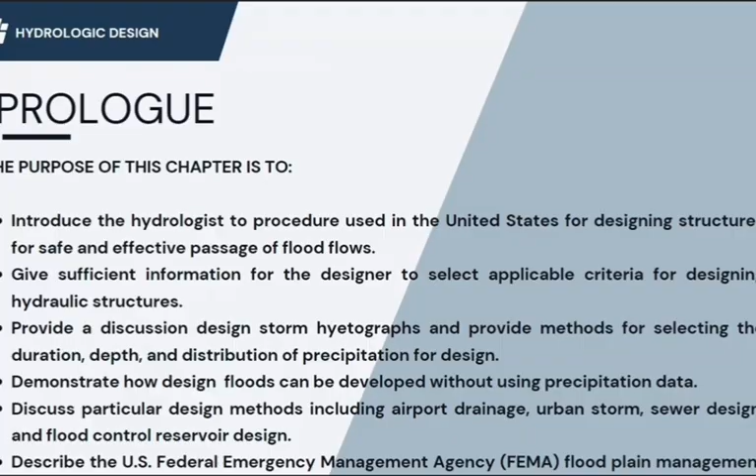Hydrologic design procedures. Procedures for estimating design flood flows. Interest can be in either the peak flow rate or the entire hydrograph.

Include methods that examine historical or projected flood flows to arrive at a suitable estimate - flow-based methods - and methods that evaluate the storms that produce floods and then convert the storms to flood flow rates.

Precipitation-based methods. In each case, the analysis can be based on selecting a design frequency and determining the associated flood, called frequency-based methods, or developing designs for a range of flood frequencies and narrowing the final choice on the basis of

long-term costs and benefits, called risk-based methods, or designing on the basis of an estimate of the probable maximum storm or maximum flood that could occur at the site, called critical event methods.

Minor structure design. Minor structure design is largely based on frequency-based or sometimes risk-based methods. Several steps in the hydrologic approach to minor structure design are common to most design handbooks and adopted techniques.

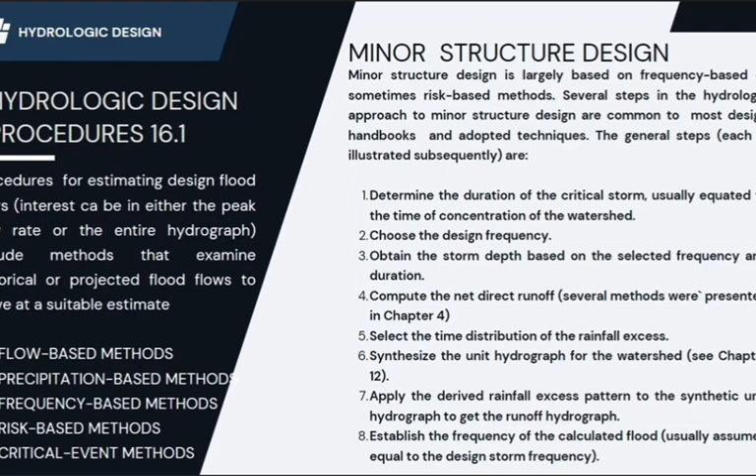Number 7, apply the derived rainfall excess pattern to the synthetic unit hydrograph to get the runoff hydrograph. Number 8, establish the frequency of the calculated flood, usually assumed equal to the design storm frequency.

Major structure design. Hydrologic design aspects of major structures are considerably more complex than those of a small dam, crossroad, culvert, or urban drainage system.

A design storm hydrograph for large dams still is required, but it is put to greater use. The design storm hydrograph is routed to determine the adequacy of spillways and outlets operated in conjunction with reservoir storage.

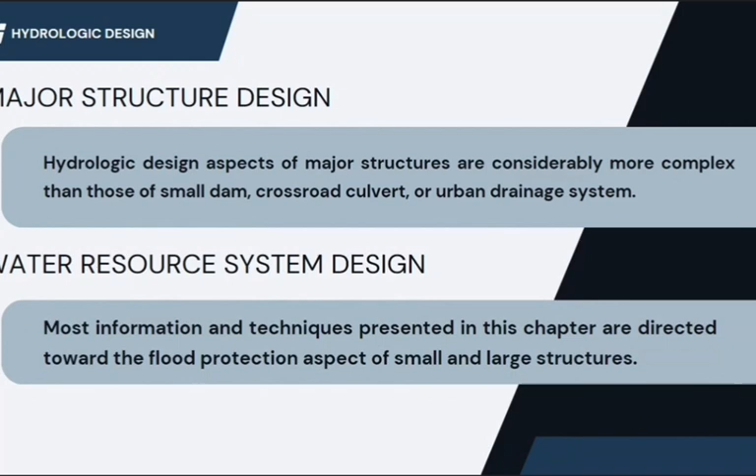Degree of protection provided for downstream life and property, project economy, agency policy, and construction standards, and reservoir operational requirements. Major structure design is largely based on critical event methods.

Next is water resource system design. Most information and techniques presented in this chapter are directed toward the flood protection aspect of small and large structures.

Needless to say, a major structure is designed for more than just flood protection. It is multi-purpose and may provide storage for irrigation, power, water supply, navigation, and flow augmentation.

The proper allocation of storage to these uses requires an understanding of the entire stream flow history in terms of the frequency of occurrence of low flows and average monthly, seasonal, and yearly flows, as well as the historical and

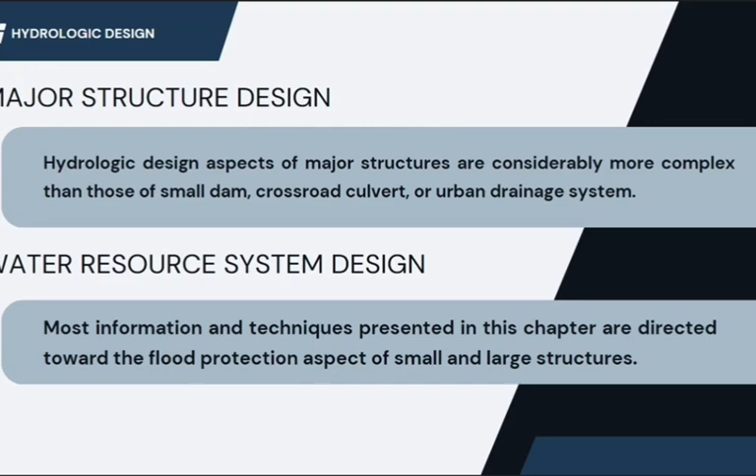design floods. Next, flow-based methods. For design locations where records of stream flows are available or where flows from another basin can be

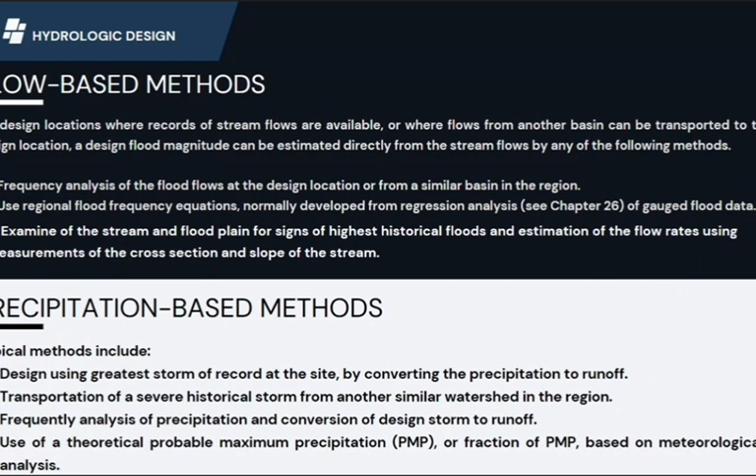transported to the design location, a design flood magnitude can be estimated directly from the stream flows by any of the following methods. Number 1, frequency analysis of the flood flows at the design location or from a similar basin

in the region. Number 2, use regional flood frequency equations normally developed from the regression analysis of gauged flood data.

Number 3, examination of the stream and floodplain for signs of highest historical floods and estimation of flow rates using measurements of cross-section and slope of the stream.

Precipitation-based methods. Typical methods include design using the greatest storm of record at the site by converting the precipitation to runoff. Number 2, transposition of a severe historical storm from another similar watershed in the region.

Number 3, frequency analysis of precipitation and conversion of design storm to runoff. Number 4, use of a

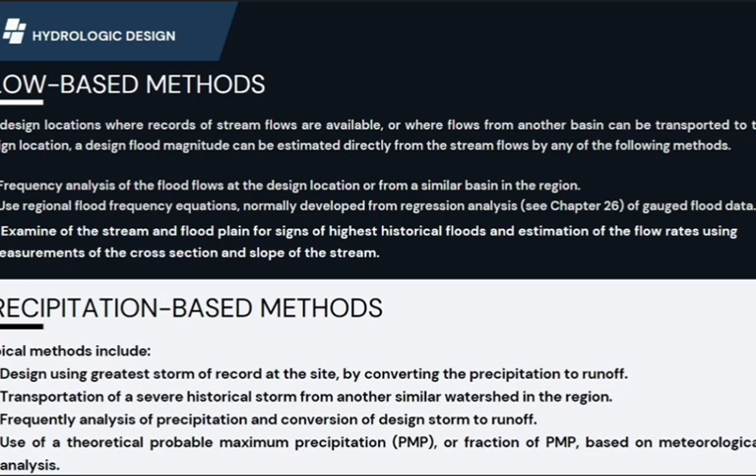theoretical probable maximum precipitation or fraction of PMP based on meteorological analysis.

Frequency-based methods. Regardless of whether flow or precipitation data are used, design most often proceeds by selecting a minimum acceptable recurrence interval and using procedures from Chapter 27 to determine the corresponding worst condition storm or flood that could be equaled or exceeded during the selected recurrence interval. Criteria for selecting design recurrence intervals are summarized in section 16.3.

Results from frequency analysis of flood flow data normally provide reliable estimates of 2, 5, 10, and 25-year flows. Extrapolation beyond the range of the period of flow records is allowed, but is less reliable.

Risk-based methods. Recent trends in the design of minor and major structures are toward the use of economic risk analysis rather than frequency-based design. The risk methods select the structure size as that which minimizes total expected costs. These are made up of the structure cost plus the potential flood losses associated with the particular structure.

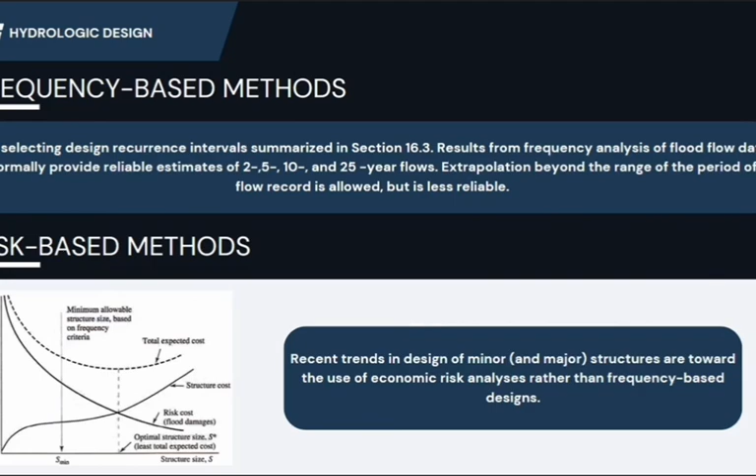Critical event methods. Because of the high risk to lives and property below major structures, their design generally includes provisions for a flood caused by a combination of the most severe meteorologic and hydrologic conditions that are possible. Instead of designing for some frequency or least expected total cost, flood handling facilities for the structures are sized to safely store or pass the most critical storm or flood possible.

Methods for designing by critical event techniques include: number 1, estimating the probable maximum precipitation and determining the associated flood flow rates and volumes by transforming the precipitation to runoff. Number 2, determining the probable maximum flood by determining the PMP and converting it to a flood by application of a rainfall runoff model, including snow melt runoff if pertinent.

Number 3, examining the floodplain and stream to identify paleo flood evidence such as high water marks, boulder marks on trees or banks, debris lines, historical accounts by local residents, or geologic or geomorphologic evidence.

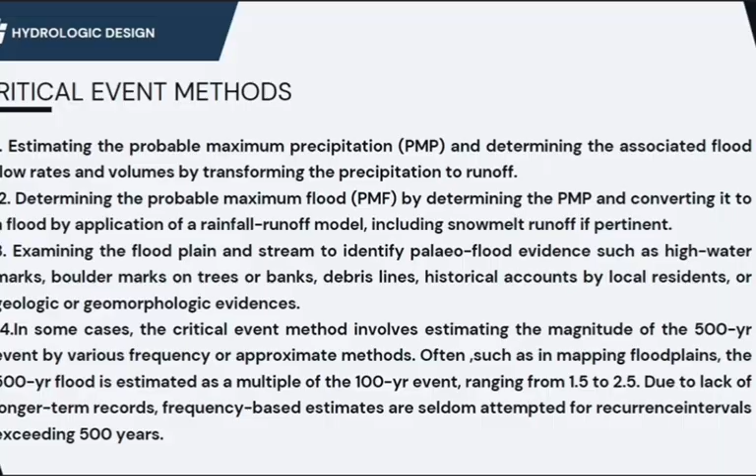Data for hydrologic design. The design of any structure requires a certain amount of data, even if only a field estimate of the drainage area and a description of terrain type and cover. The following material identifies some general data types and sources.

Physiographic data. Hydrologic study for any structure requires a reliable topographic map. United States Geological Survey topographic maps usually are available. The mapping of the United States is almost complete with 15-minute quadrangles, and many of these are mapped by 7.5-minute quadrangles. County maps and aerial photos can also be used to advantage in making preliminary studies of the watershed.

Hydrologic data. One difficulty in hydrologic design is that of getting data for the region under study. Considerable data can be acquired from previously published reports issued by governmental agencies and or universities. The following is a list of federal agencies that publish hydrologic data.

Agricultural Research Service, Soil Conservation Service, Forest Service, U.S. Army Corps of Engineers, National Oceanic and Atmospheric Administration, Bureau of Reclamation, Department of Transportation, U.S. Geological Survey Topographic Division, U.S. Geological Survey Water Resources Division. Additional data often can be procured from departments of state governments, interstate commissions, and regional and local agencies.

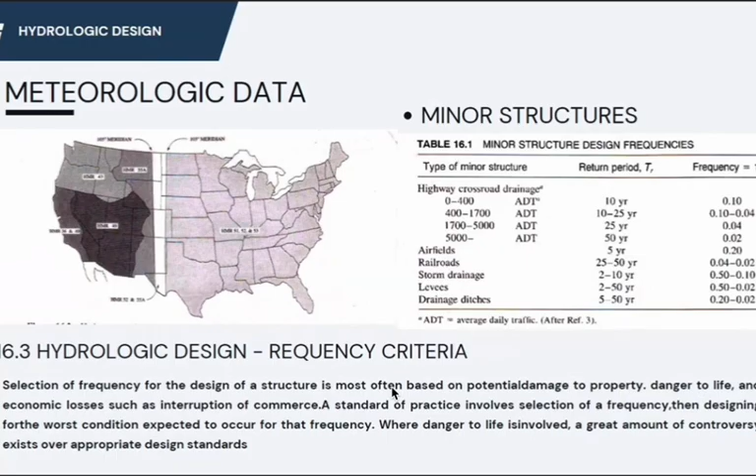Large dams. Dams require hydrologic analysis during the design of the original structure and during periodic safety evaluation. Significant economic and human losses are possible when large quantities of water are rapidly released from storage. Initial heights of retarded water behind the dam, disregarding the total volume of stored water, can produce destructive flood waves for a considerable distance downstream.

Based on two criteria, the Task Force on Spillway Design Floods recommended the classification of large dams as listed in Table 16.2. The type of construction has not been included in this grouping, although it affects the extent of failure resulting from overtopping. Many of the federal agencies have adopted definitions for hydraulic elements of dams. The following list is used by the Soil Conservation Service.

A spillway is an open or closed channel, or both, used to convey excess water from a reservoir. It may contain gates, either manually or automatically controlled, to regulate the discharge of excess water.

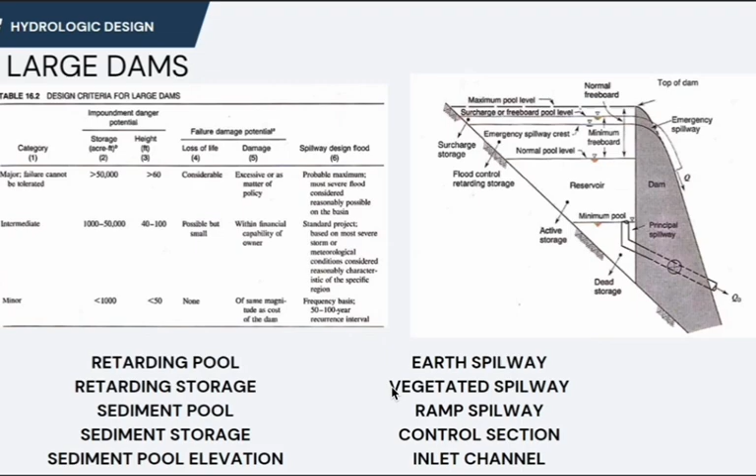Small dams customarily are designed using two or more levels of frequency to provide an emergency spillway and ensure an adequate allowable freeboard.

Class A structures are located in rural or agricultural areas where failure might damage farm buildings, agricultural land, or township or country roads. Class B structures are located in predominantly rural or agricultural areas where failure might damage isolated homes, main highways, or minor railroads, or cause interruption of use or service of relatively important public utilities.

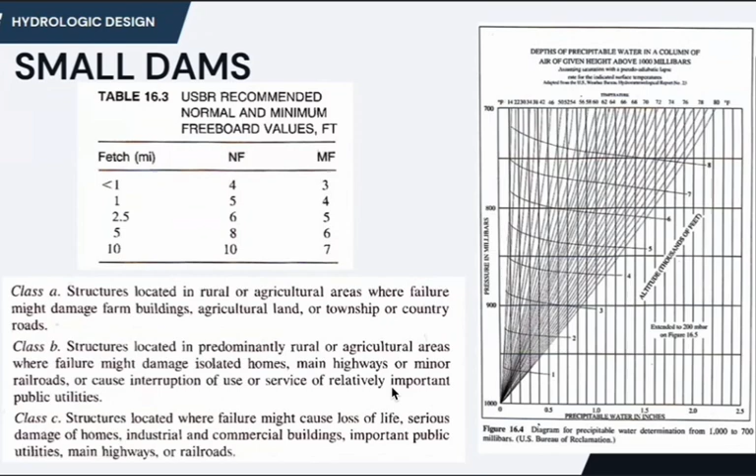Class C structures are located where failure might cause loss of life, serious damage of homes, industrial and commercial buildings, important public utilities, main highways, or railroads.

Estimates of PMP are based on an investigation by the U.S. Weather Bureau conducted to establish the maximum possible amount of precipitable water that could be achieved throughout the United States.

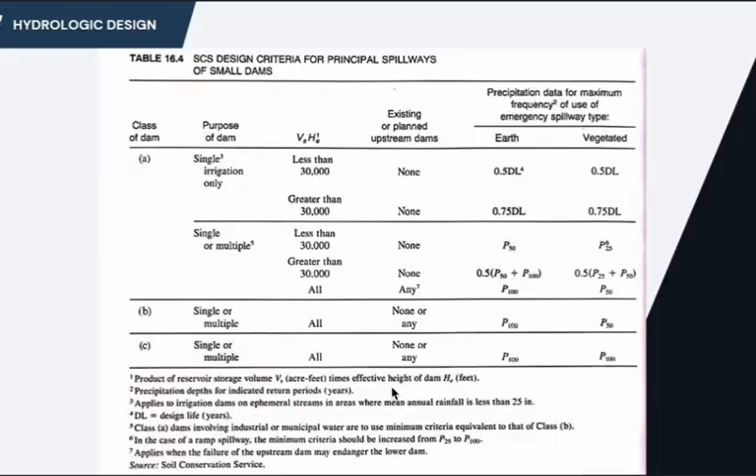Major structures. Three general terms described in Table 16.2 are employed to designate design flood for major structures: the probable maximum flood, the standard project flood, and the frequency-based flood.

The concept of flood in this section is described by an entire discharge hydrograph that is generally synthesized from rainfall estimates. Corresponding to the three flood designations are the storm values, that is, the depth of rainfall.

These storm values are referred to as the probable maximum precipitation (PMP), the standard project storm (SPS), and the frequency-based storm. Design of the reservoir system components is commonly based on one of these representative terms, with descriptions given in the next section on design storms.

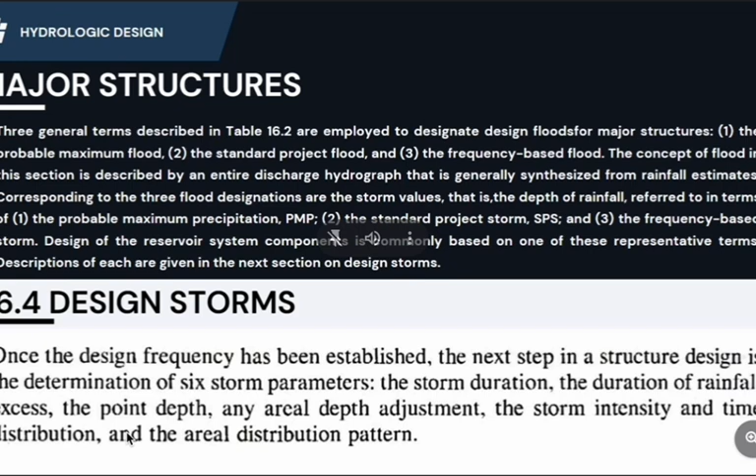Design storms. Once a design frequency has been established, the next step in structure design is the determination of six storm parameters: the storm duration, the duration of rainfall excess, the point depth, any areal depth adjustment, the storm intensity and time distribution, and the areal distribution pattern.

Duration. The length of storm used by the SCS in designing emergency and freeboard hydrographs for small dams is of 6-hour duration or the time of concentration TC, whichever is greater. Often the minor structure being designed cannot be justified economically on the basis of this length of storm.

For many minor structures, particularly urban drainage structures, a design flood hydrograph is based on a storm duration equal to the time of concentration of the watershed. This procedure uses the rational method of Chapter 15 or the synthetic unit hydrographs of Chapter 12, along with a critical storm pattern procedure produced by arranging the rainfall excess pattern into the most critical sequence.

The SCS uses 24-hour durations for all urban watershed studies. Durations of approximately 6 hours or less are satisfactory for small watersheds, but the lengths of storm for large areas require storm depths for periods of up to 10 days.

Frequency-based values are available for durations of from 2 to 10 days for locations within the United States. Similar data are also available for other selected areas outside the United States. Generally, however, the design criteria for large dams require estimates of storm depths that do not have a frequency level assigned.

IDF relationships: for short duration storms over small areas, the most convenient method of determining storm depth is to acquire the intensity duration frequency curve for the location, enter the graph with the selected duration and frequency, and convert the resulting intensity to depth of rain over the selected duration.

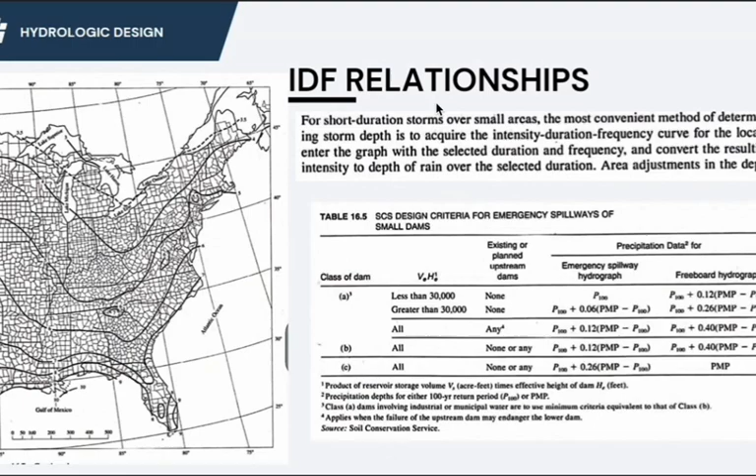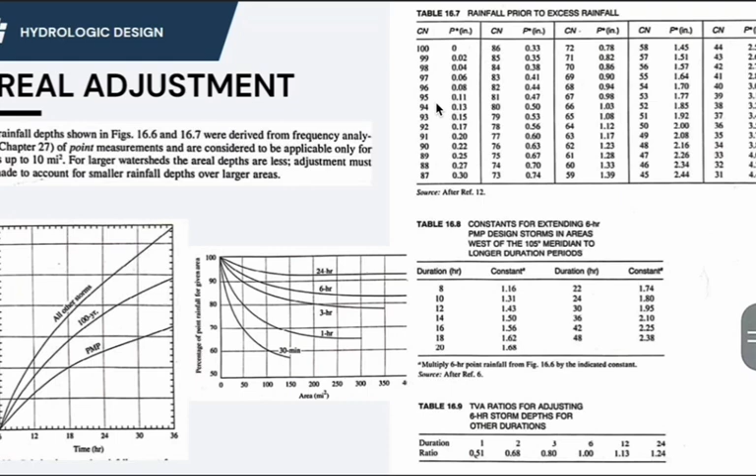Area adjustment in the depth. Areal adjustment: the rainfall depths shown in figures 16.6 and 16.7 were derived from frequency analysis of point measurements and are considered applicable only for areas up to 10 mi². For larger watersheds the areal depths are less, so adjustment must be made to account for smaller rainfall depths over larger areas.

Duration frequency curves define the rain intensities for delta T, 2 delta T, 3 delta T, etc. increments of time, then these blocks of rain intensities are organized in some pattern, usually symmetrical, around the center of the storm, ensuring that the area under the hyetograph equals the design storm depth P, spread over the design storm duration D.

To apply the procedure, successive depths of equal probability storm with durations of delta T, 2 delta T, 3 delta T, 4 delta T are determined from the IDF curve and tabulated. Next, any of a variety of procedures such as the alternating block method, the Chicago method, or the balanced method are available for distributing these blocks and assuring that the total rain depth equals P.

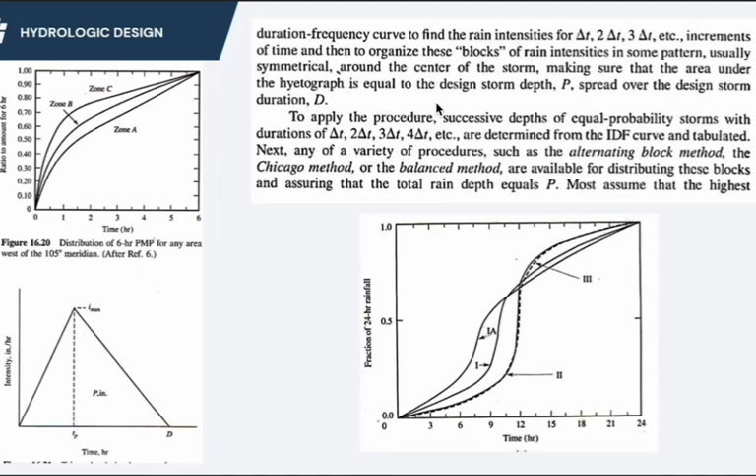Most assume that the highest.

Triangular distribution: the simplest design storm distribution is a triangular shape, because the depth P and duration D of rain are already established, the peak intensity is found by solving for the height of the triangular hyetograph as shown in figure 16.21. The only remaining decision is the time to the peak, TP. The ratio TP over D has been investigated for large numbers of storms.

Values range from about 0.3 to 0.5. Once the triangle is constructed, the intensities at regular intervals may be graphically or analytically determined for input to the rainfall-runoff model being used for design.

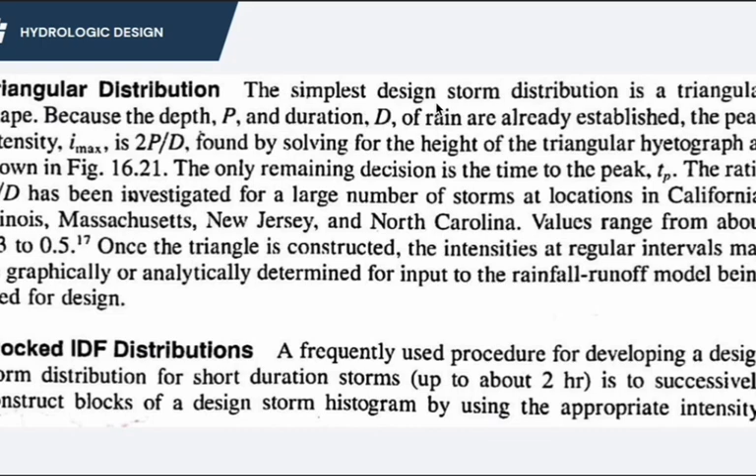Block IDF distributions: a frequently used procedure for developing a design storm distribution for short duration storms up to about 2 hours is to successively construct blocks of a design storm histogram using the appropriate intensity.

Time distribution: after the storm depth and duration have been established, the designer must select a representative hyetograph. The choice will significantly affect the shape and peak value of the resulting runoff hydrograph. Any decision must be based on either the worst possible storm pattern or an analysis of recorded storm distribution patterns.

Huff divided recorded storm distribution patterns from small Midwestern watersheds into four equal probability groups, from the most severe first quartile to the mildest fourth quartile. The median curve for the first quartile storm is given in figure 16.14, which is used for example in the RRL and ILLUDAS simulation models of chapter 25.

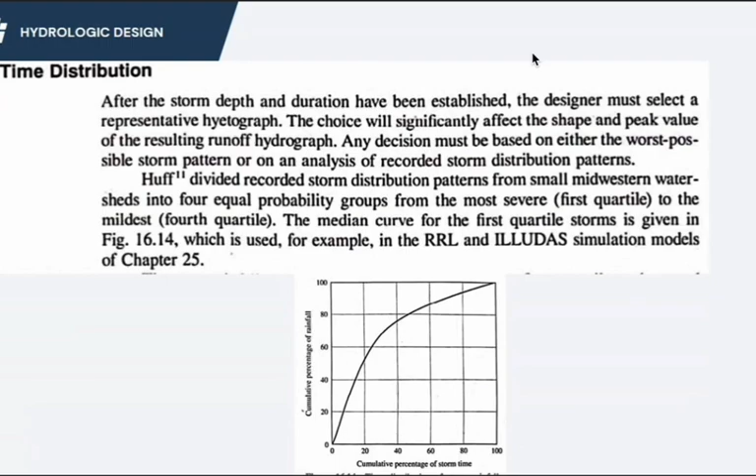Critical event methods: for some structures, such as large dams, design of the flood handling facilities by frequency-based methods is not appropriate. For any fixed frequency, a flood exceeding the design level is possible and may have catastrophic consequences.

These methods include the use of the probable maximum precipitation or PMP, probable maximum flood or PMF, record high storm depths, record high floods, multiples of frequency-based floods, and paleohydrology.

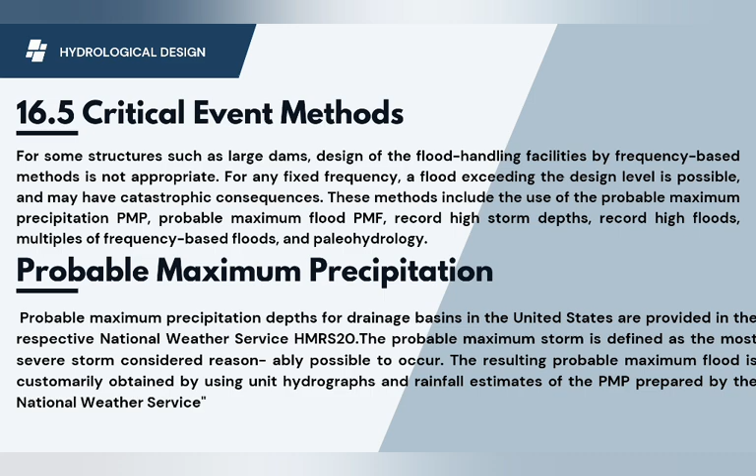Probable maximum precipitation depths for drainage basins in the United States are provided in the respective National Weather Service HMR 20. The probable maximum storm is defined as the most severe storm considered reasonably possible to occur. The resulting probable maximum flood is customarily obtained by using unit hydrographs and the rainfall estimates of the PMP prepared by the National Weather Service.

A proposed method to estimate PMP, advocated by Hershfield, suggests that the 24-hour PMP at a point be computed by the equation PMP24 equals P plus K S N, where PMP24 is the 24-hour probable maximum precipitation, P is the mean of the 24-hour annual maximums over the period of record, K is a constant equal to 15, and S is the standard deviation of the annual maximums.

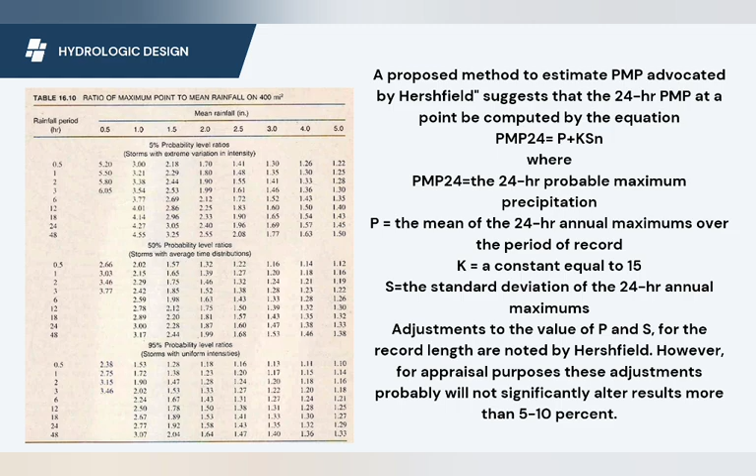Adjustments to the value of P and S for the record length are noted by Hershfield. However, for appraisal purposes, these adjustments probably will not significantly alter results more than 5 to 10%.

Record extremes, Creager and Crippen and Bue envelope curves, are used where frequency-based methods of PMP and PMF studies are unwarranted. Design for critical events can be based on the greatest recorded rain or flood flow for the location. Similarly, tables or curves of flood data can be developed to give the maximum floods of record in the region under study.

In cases where estimates of PMP had not been made, volumes of rainfall to be expected can also be approximated from Creager rainfall envelope curves of world record rainfalls. Maximum flood flow data for 883 sites up to 25,900 square kilometers form the basis for the Crippen and Bue envelope equation, given by Q_P equals 10 raised to the quantity C1 plus C2 log(A) plus C3 times quantity log(A) squared plus C4 times quantity log(A) cubed, where Q is the maximum flow and A is the drainage area.

Standard project storm is another rainfall depth used in the design of large dams. This value is usually obtained from a survey of severe storms in the general vicinity of the drainage basin. The storm selected as the SPS may be oriented to produce the maximum amount of runoff for the SPF.

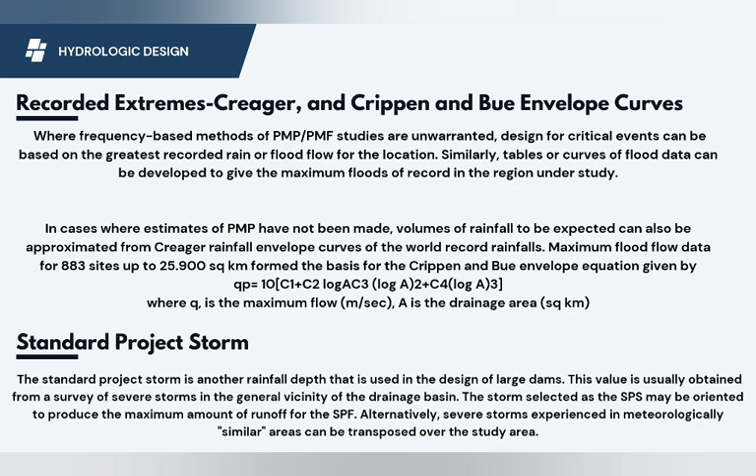Transposition limits are based on climatological similarity, synoptic weather patterns, and knowledge of atmospheric processes. A number of severe storms are selected from the storms of record. Depth-area-duration curves for these are developed and presented in graphical form, usually for a particular point location within the basin, referred to as an index point. This position is used as a reference location for further calculations regarding the SPS.

The SPS differs from PMP estimates and is patterned after a storm of record that causes the most severe rainfall depth-area-duration relation. Appropriate allowance should be made for inclusion of snowmelt when calculating design storm hydrographs from the standard project storm.

Generally, the standard project storm rainfall is approximately 50% of the PMP. Records of the 4 or 5 largest storms should be critically examined to find a suitable composite for use in calculating the SPS. When this data is not available, a reasonable percentage of the PMP can be substituted.

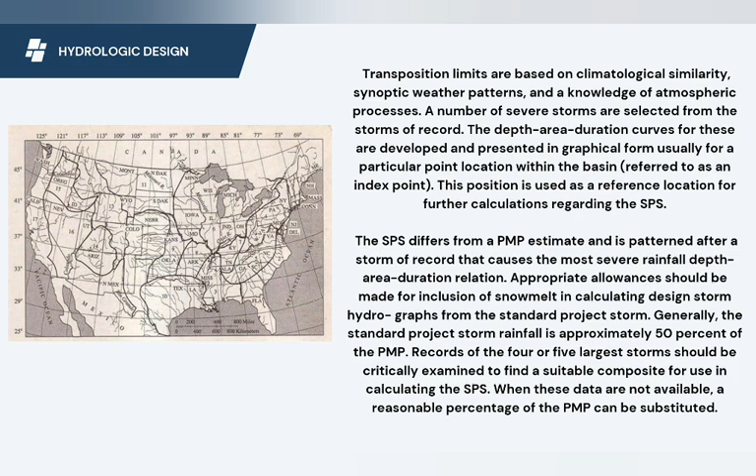Frequency-based flood for high-hazard dams: the federal agency standard for designing and evaluating spillway capacities for dams of high hazard potential has been the PMF. The use of such a conservative standard has been challenged, especially with concern over the need and cost to modify existing federally licensed dams so that they safely pass the probable maximum flood.

A committee of the National Research Council recommended continued use of the PMF as the general design standard for proposed high-hazard dams, and for existing high-hazard dams. The committee recommended that design should take into account estimated flood probabilities, expected project performance, and incremental damages that would result from dam failure for a range of floods up to and including the probable maximum flood.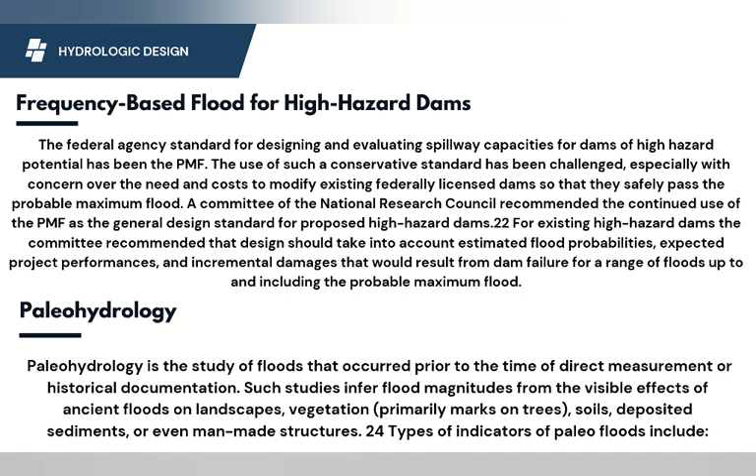Paleohydrology is the study of floods that occurred prior to the time of direct measurement or historical documentation. Such studies infer flood magnitude from the visible effects of ancient floods on landscapes, vegetation, soils, deposited sediments, or even man-made structures. Types of indicators of paleofloods include slack water sand and silt deposits that result from deposition of suspended sediments transported during extreme floods.

Stratigraphic anomalies such as organic layers, tributary alluvium, mud cracks, bed forms such as ripples or dunes, or rounded gravel or cobble deposits. Flood-transported litter such as organic materials, buried trees, compounds found only in buried soils, and archaeological debris or refuse.

High water marks from ancient floods, such as rock or floating debris, scars on tree trunks, floating debris deposits, sediment deposits in elevated caves, and scour lines or other disturbances along canyon or terrace walls.

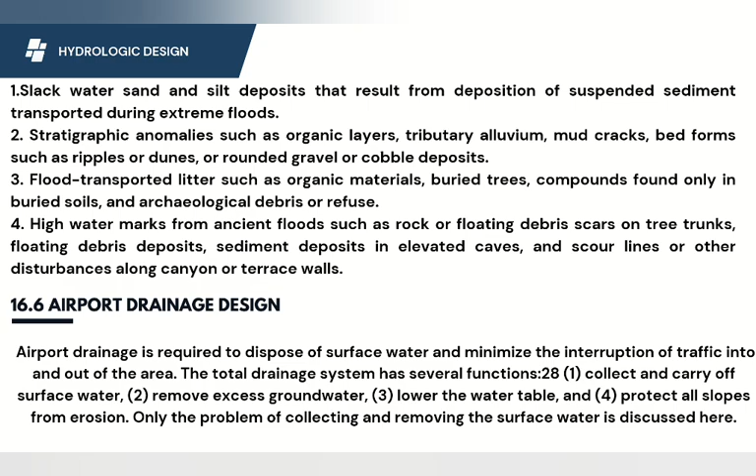Airport drainage system: airport drainage is required to dispose of surface water and minimize the interruption of traffic into and out of the area. The total drainage system has several functions: collect and carry off surface water, remove excess groundwater, lower the water table, and protect all slopes from erosion. Only the problem of collecting and removing surface water is discussed here.

The design of most airport drains relies on the rational method, although some efforts are being made to evaluate this system by means of other techniques. Drainage calculations are usually based on collected rainfall data and a 1-foot contour topographic map of the proposed finish site.

The entire system of drainage is outlined on this map with proper identification of sub-areas, main and lateral storm drains, direction of flow, gradients, inlets, and surface channels. The final design is attained by calculating the most reasonable cost to provide satisfactory drainage.

Design of urban storm drain systems: storm drainage for urban areas starts as sheet flow on paved areas. These flows combine with flows from rooftops and hydrographs from pervious zones, forming inflow to surface swales or open street gutters. For floods up to the design frequency, surface runoff enters storm sewers through street inlets or outlets from detention or retention storage areas.

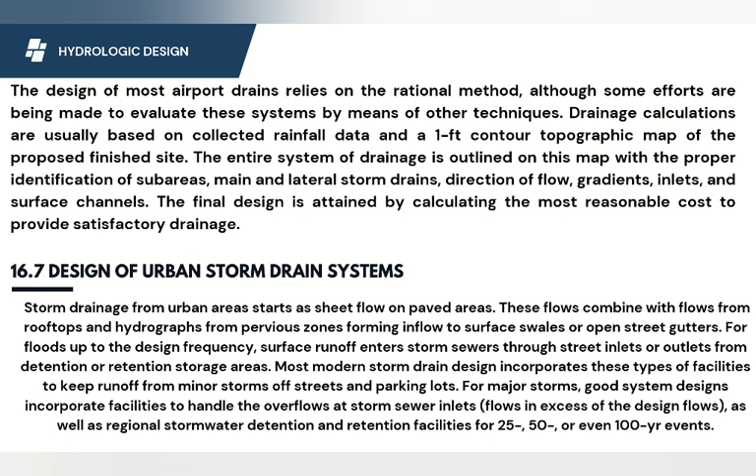Most modern storm drain design incorporates these types of facilities to keep runoff from minor storms off streets and parking lots. For major storms, good system designs incorporate facilities to handle the overflow at storm sewer inlets, as well as regional stormwater detention and retention facilities for 25, 50, or even 100-year events.

The calculation of individual hydrographs to the inlet of each section is influenced by the infiltration capacity of the pervious areas, overland flow delays, depression storage, detention in gutters, house drains, catch basins, and the storm sewer systems and interception in extensively landscaped locations. So first, the infiltration.

The ability of the soil to infiltrate water depends on several characteristics of the soil as noted in Chapter 3. The range of values given in the following table is typical of various bare soils after one hour of continuous rainfall.

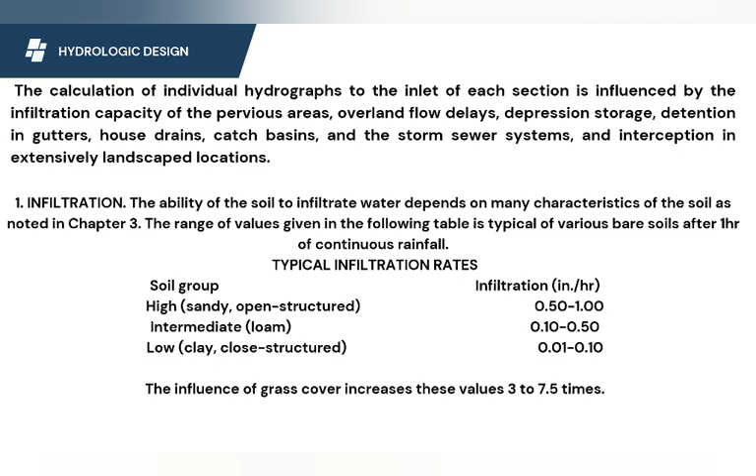Number two is retention. This is usually assumed to be 0.10 inch for pervious surfaces such as lawns and normal urban pervious surfaces.

Floodplain analysis. Due to heavy monetary and other floodplain losses over the years, the federal government has been conducting studies of floodplains on the nation's waterways and methods for protecting life and property and preventing overdevelopment that causes increased water levels and more widespread flooding.

Hydrology is a key ingredient in the studies for identifying potential flow rates, studying effects of dams, open channels, and other water control structures on hydrographs, and determining volumes of floodwaters that will need to be safely stored and conveyed by the waterways and floodplains.

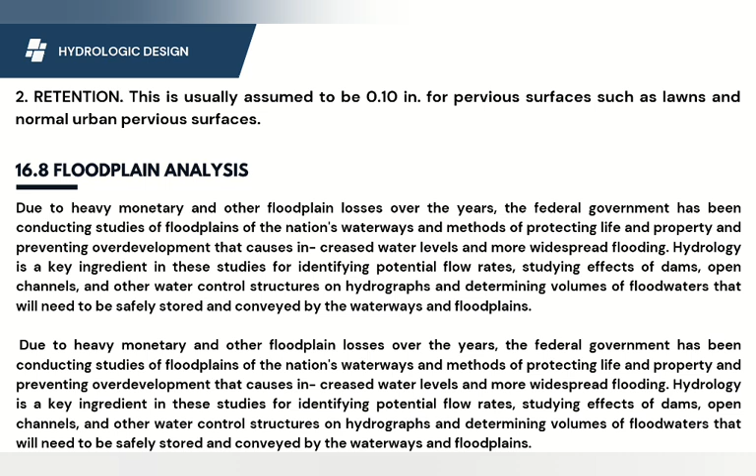The floodplain mapping effort produced a large amount of data and analysis useful to design hydrologists.

The products of the programs include the 10, 50, 100, and 500-year frequency discharge for streams, and the 10-year, 50-year, 100-year, and 500-year flood elevations for riverine, coastal, and lacustrine floodplains.

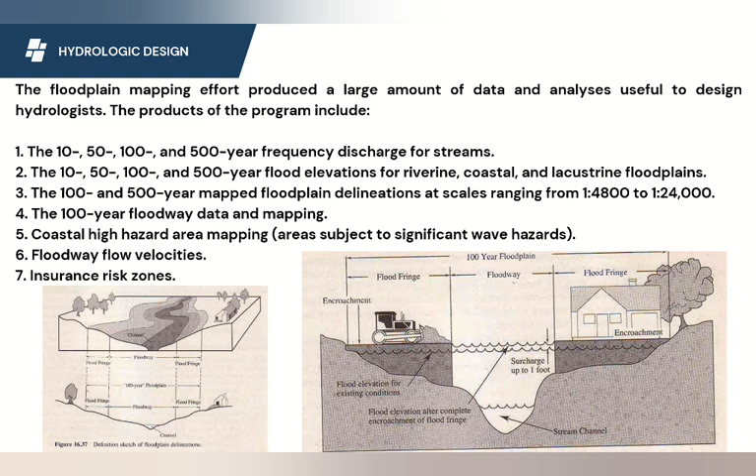The 100 and 500-year map floodplain delineations at scales ranging from 1 to 4,800 to 1 to 24,000, the 100-year floodway data and mapping, coastal high hazard area mapping, floodway flow velocities, and insurance risk zones.

Hydrology for floodplain studies. Flood flow frequency estimates for gauge locations in NFIP studies are based on log Pearson Type III analysis of stream flow records. Annual peak flows and historical data are fitted according to procedures recommended by FEMA.

U.S. flood hazards. Despite considerable effort and expenditure in identification of floodplains and flood hazard areas, dam failures and other catastrophes continue to result in severe damage to life, property, and the environment. Floods from hurricanes, intense rainstorms, and rapid snowmelt or structure failure have all contributed to the loss of life.

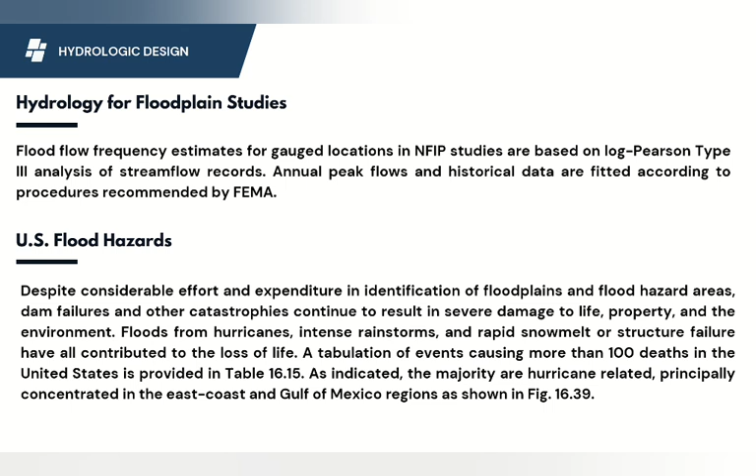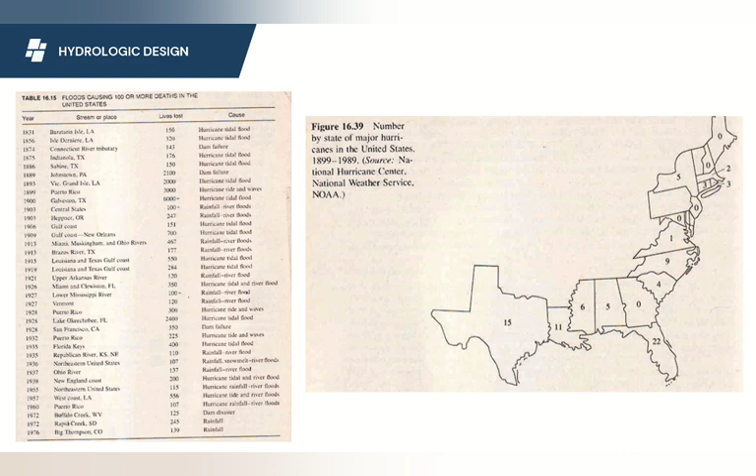A tabulation of events causing more than 100 deaths in the United States is provided in Table 16.15. As indicated, the majority are hurricane-related, principally concentrated in the East Coast and Gulf of Mexico regions, as shown in Figure 16.39, showing floods causing 100 or more deaths in the United States and the number by state of major hurricanes in the United States.

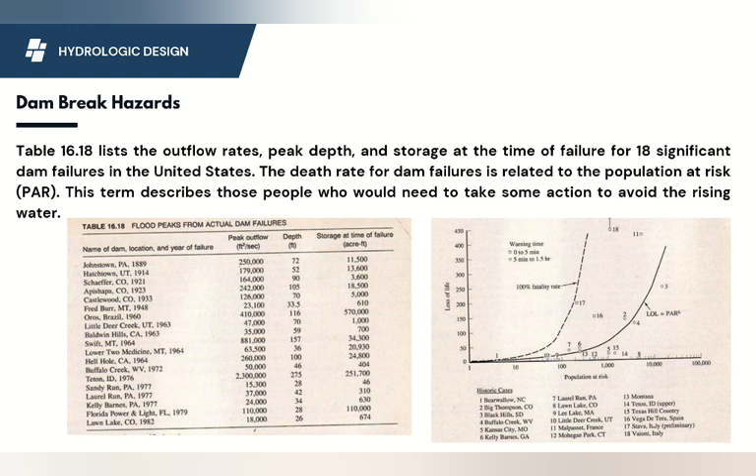So overall, much of the material presented in the hydrology textbook is introduced to define hydrologic principles that should be understood by engineers before attempting to design hydraulic structures. This chapter compiles these principles into a set of basic tenets for design of major and minor hydraulic structures.

For design using streamflow records, the analyst need only select the basis of frequency-based or risk-based critical event design, and then couple the procedures described here with those in Chapters 15, 26, and 27.

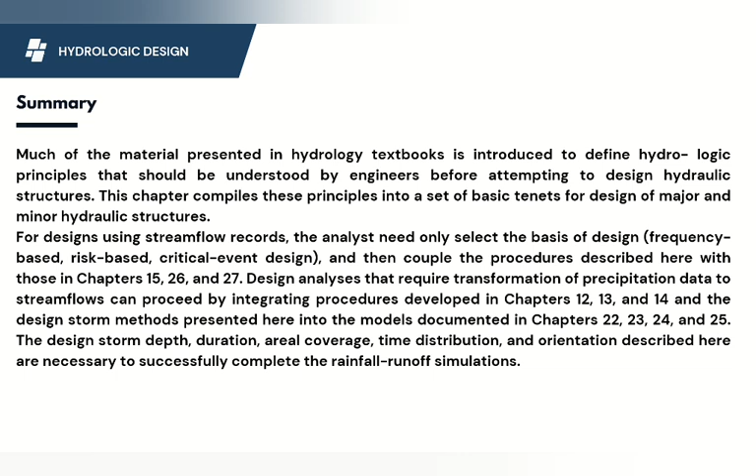Design analysis that requires transformation of precipitation data to stream flows can proceed by integrating procedures developed in Chapters 12, 13, and 14, and the design storm methods presented here into the models documented in Chapters 22, 23, 24, and 25. The design storm depth, duration, areal coverage, time distribution, and orientation described here are necessary to successfully complete the rainfall runoff simulations.